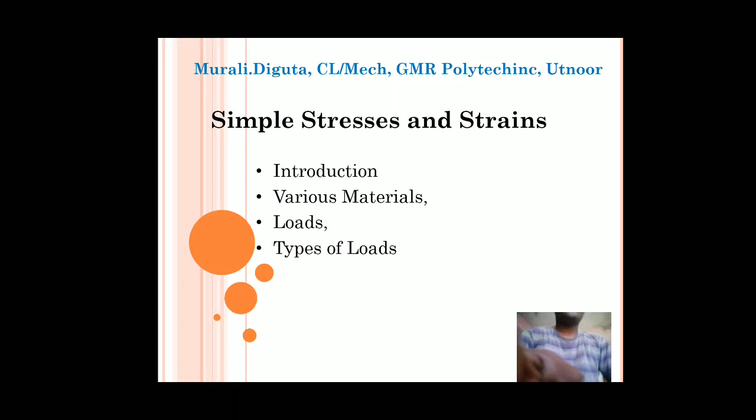Strength of material is the subject which deals with how solid bodies react when subjected to various

types of loading. We consider solid bodies like bars loaded longitudinally, beams subjected to bending, shafts subjected to torsion, and so on.

Now in the simple strength of material, the first chapter is simple stresses and strains.

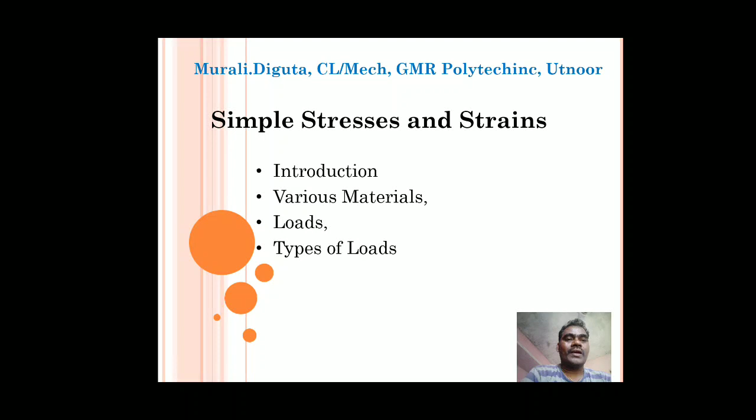In this class, we are going to discuss introduction of stresses and strains, various types of materials, then loads and types of loads.

Materials which we come across may be classified into elastic, plastic and rigid materials.

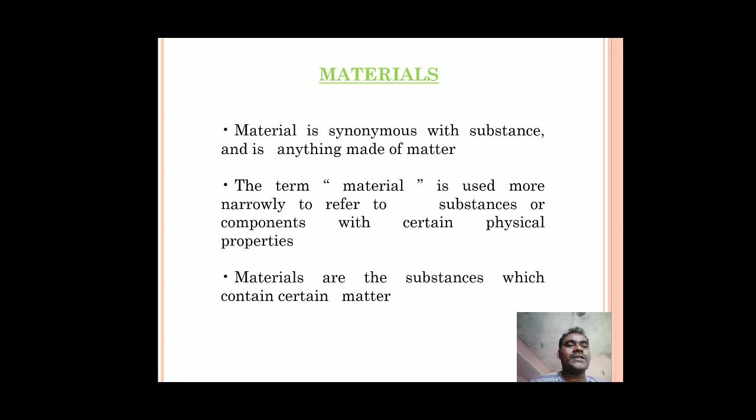The term materials is used more narrowly to refer to substances or components with certain physical properties. Materials are the substances which contain certain matter.

Materials are useful for engineering applications, such as the first one being the

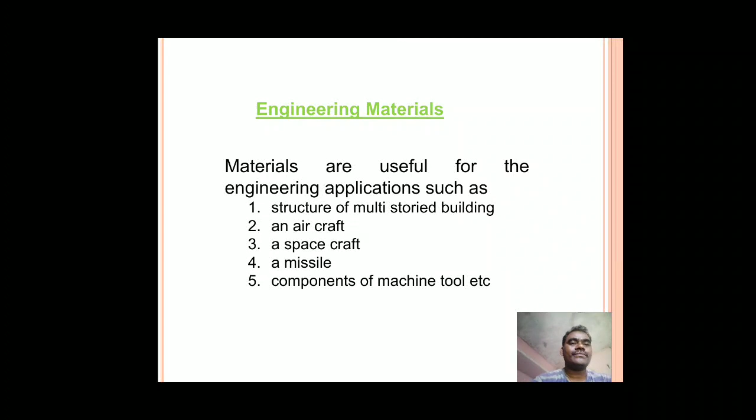structure of multi-storied buildings, second an aircraft, third a spacecraft, fourth a missile, fifth components of machine tools, etc.

Classification of materials. Materials are broadly classified into metals and its alloys, and second, non-metals.

Examples of metals and its alloys: iron, copper, aluminium, steel, etc. Examples of non-metals: wood, glass, rubber, plastic, etc.

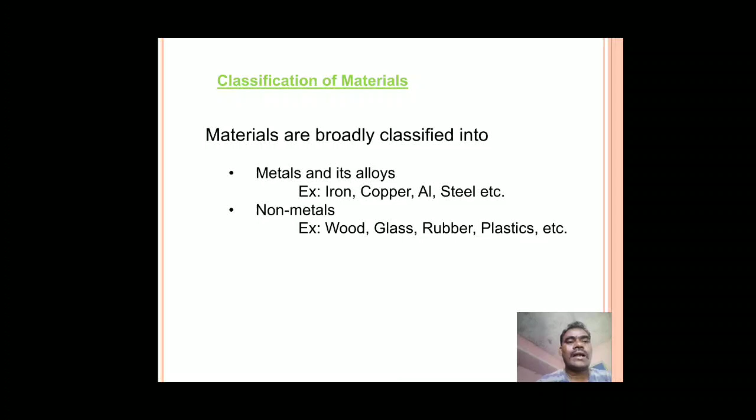Various engineering materials: the next topic is elastic materials and plastic materials.

Elastic materials: an elastic material undergoes a deformation when subjected to an external loading such that the deformation disappears on the removal of loading.

Plastic materials: a plastic material undergoes continuous deformation during the period of loading, and the deformation is permanent, the material does not regain its original

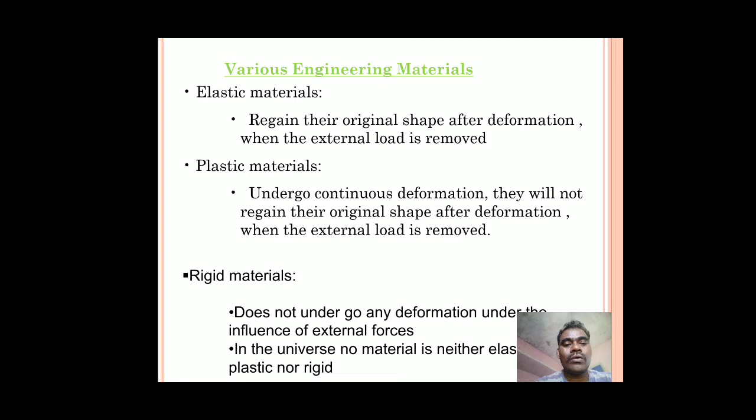dimension on removal of the loading. Next, rigid materials: a rigid material does not undergo any deformation when subjected to external loading.

Strength of materials: strength of material is a subject which deals with how solid bodies react when subjected to various types of loading. It also deals with the behavior of bodies under the action of external loads.

The deformation under load is of major interest, to find out whether or not a given member fails under the load.

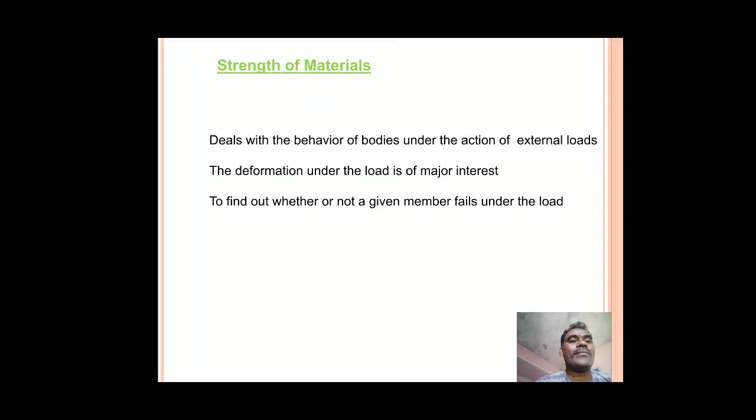Now, load. Any external force acting on the body is called load. There are different types of loads according to the action of the force.

The first one is the external force, may be dead weight, weight not in motion. The dead weight acts at a particular position on the body. Example is a load hanging from a crane, etc.

Frictional force due to relative motion: the force acting on a body that is in relative motion. Examples are bearings, clutches, belts, etc.

Inertia force: a force due to change of momentum. Examples are reciprocating parts of an engine.

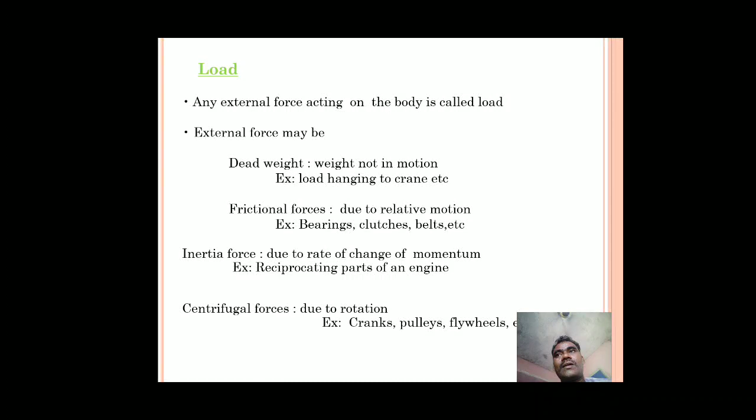Centrifugal force due to rotation. The centrifugal force occurs due to rotation. Examples are cranks, pulleys, flywheels.

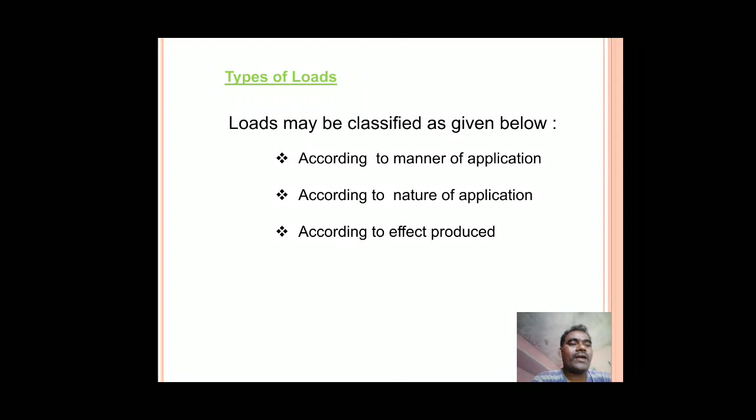According to the types of loads, they may be classified according to the manner of application, according to the nature of application, and according to the effect produced. The types of loads according to manner of application: point or concentrated loads.

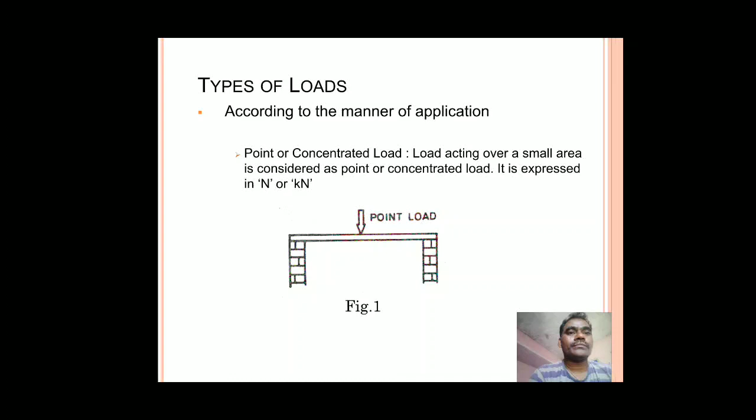Now, distributed load: load distributed over an area or along the length of a beam, column, whatever it may be. A load may be uniformly or non-uniformly distributed, meaning 5, 10, 15 or so on.

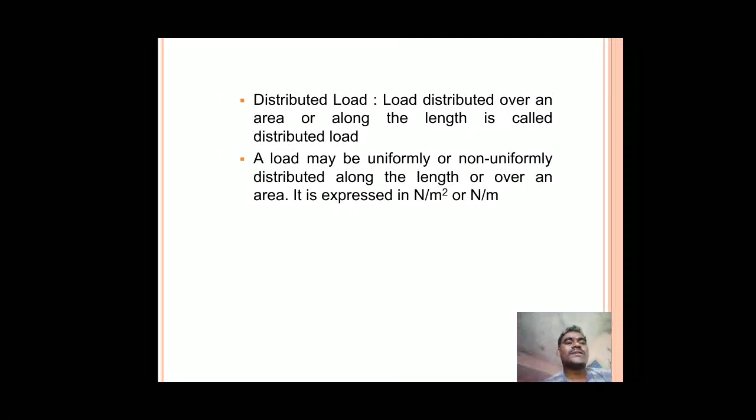or non-uniformly distributed along the length or over an area. It is expressed in Newton per meter square or Newton per meter.

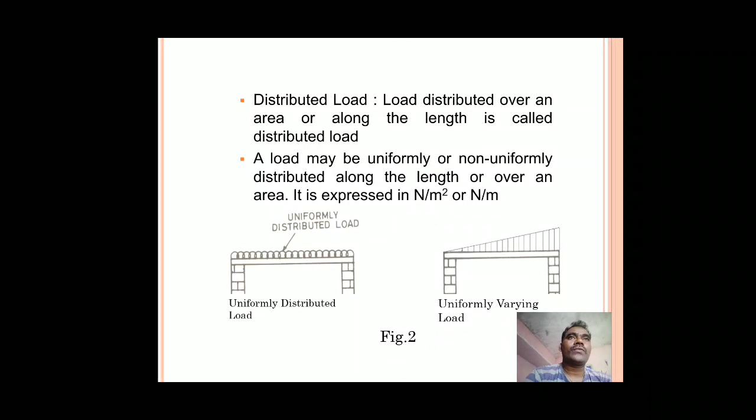According to the nature of application: static load and dynamic load. Static load increases from 0 to a certain value and remains constant during the entire time of application. Example: self weight of a machine element.

Dynamic load refers to an impact or falling load, or cases when a certain weight is falling from a certain height - this type of load is dynamic load, in which the time duration is a small fraction of a second.

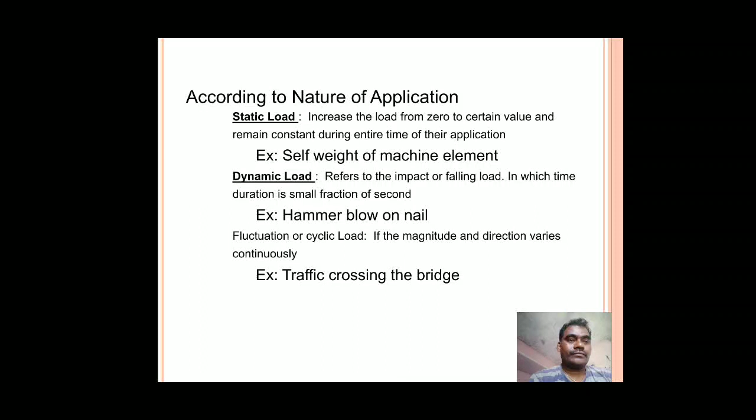Hammer blow on nails into the wall. Example is traffic crossing the bridge.

Now, according to the effect produced: tensile load. If the action of the load is to increase the length of the structural member, then the applied load is a tensile load.

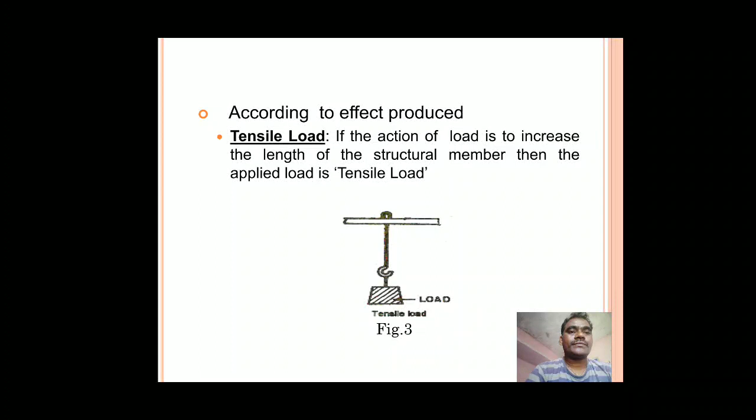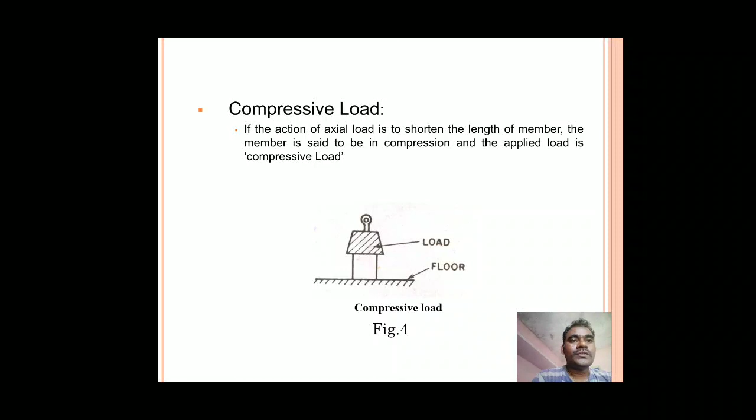Shear load: load acts perpendicular to the axis of a structural member. It tends to slide one surface with respect to another or cut it apart. Observe in figure 5 that the load acts perpendicular to the axis of the structural member.

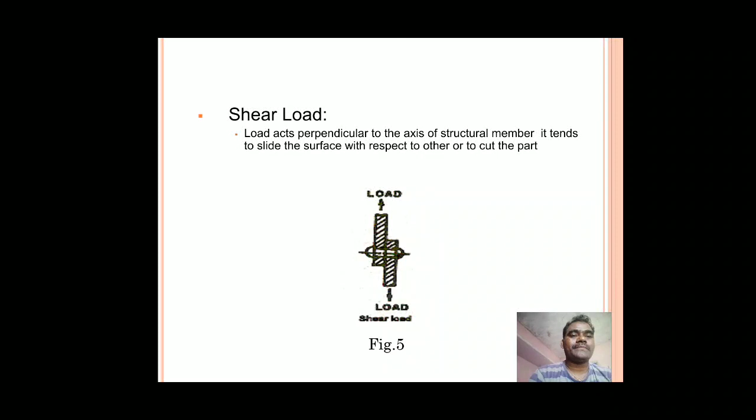so it will shear off or sometimes cut the part. This type of load occurring in that member is shear load.

Torsional load: the load which tends to twist a member. In this diagram you will observe a spanner or wrench with a socket, an extension shaft

in a drilling machine or a wrench, whatever it may be - you can observe twist or rotation being applied as a load in that figure. That type of load acting on the member is torsional load.

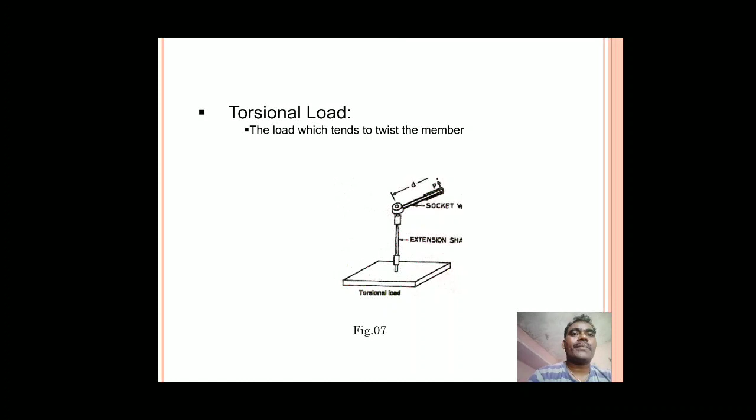Bending load: it is a transverse load tending to bend the structural member. Observe the figure - both sides fixed, with a point load acting at the middle of the beam, so it tends to bend, or bending occurs in the middle of the span of the beam.

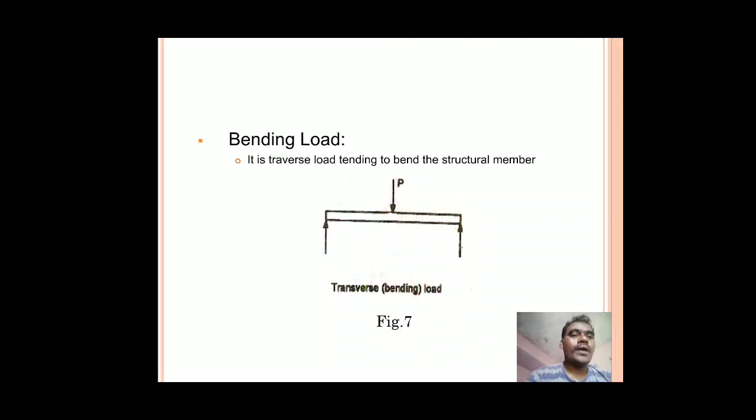So this type of load is bending load. Thank you one and all.